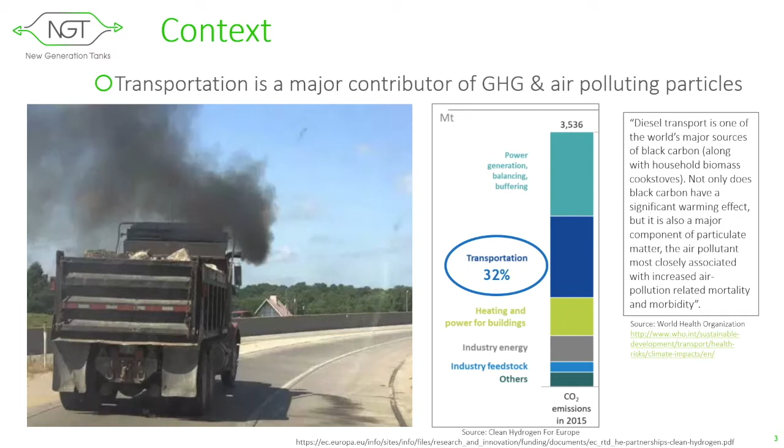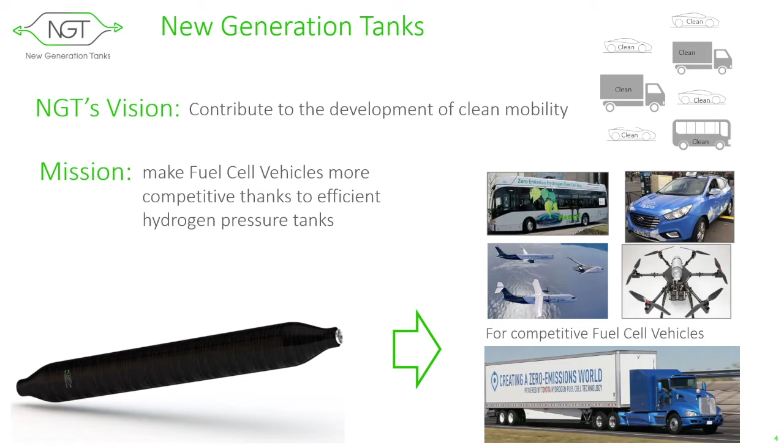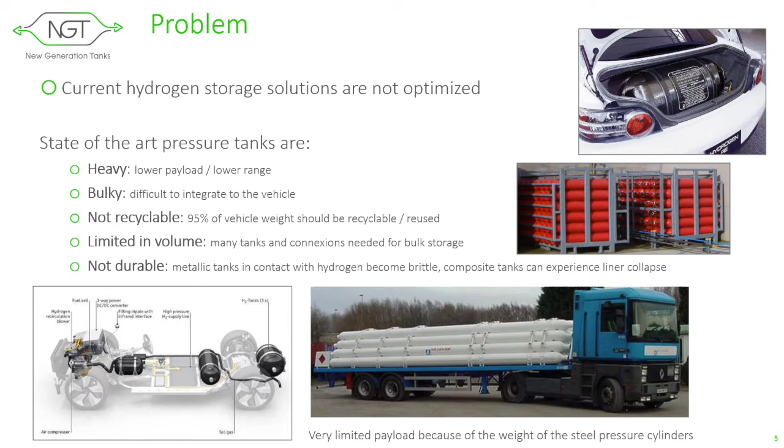New Generation Tanks is willing to contribute to the development of clean mobility. Its mission is to make fuel cell vehicles more competitive thanks to efficient hydrogen pressure tanks. The existing hydrogen storage solutions are not optimized, and pressure tanks are heavy, bulky, difficult to integrate to vehicles, not recyclable, limited in volume, and not durable.

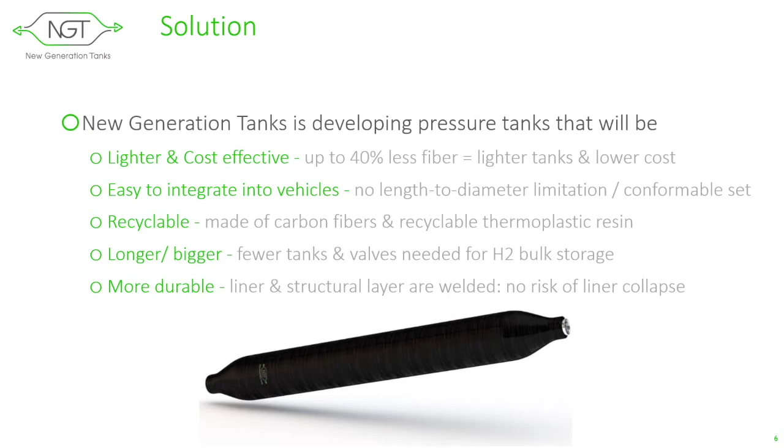New Generation Tanks, or NGT, is developing thermoplastic composite pressure tanks that will be lighter than state-of-the-art pressure tanks, easier to integrate into vehicles, recyclable, and can be made longer and bigger, with a design and concept that optimizes durability.

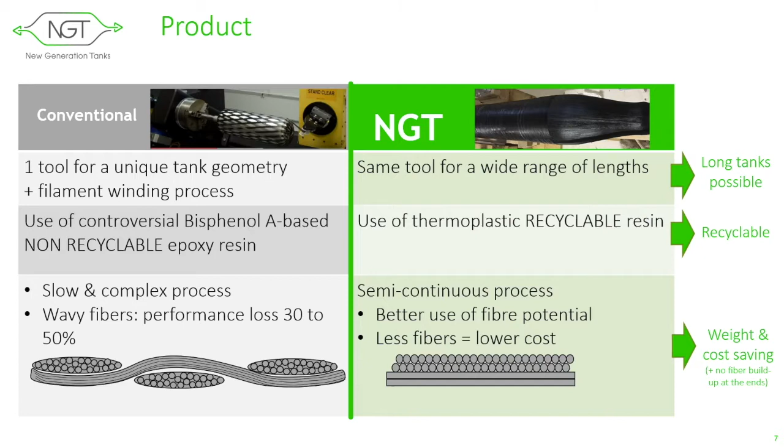Compared to the conventional carbon fiber pressure tank manufacturing process, NGT can make tanks of any length with one single tool, uses recyclable thermoplastic resin, and uses carbon fibers more efficiently, which allows it to save weight.

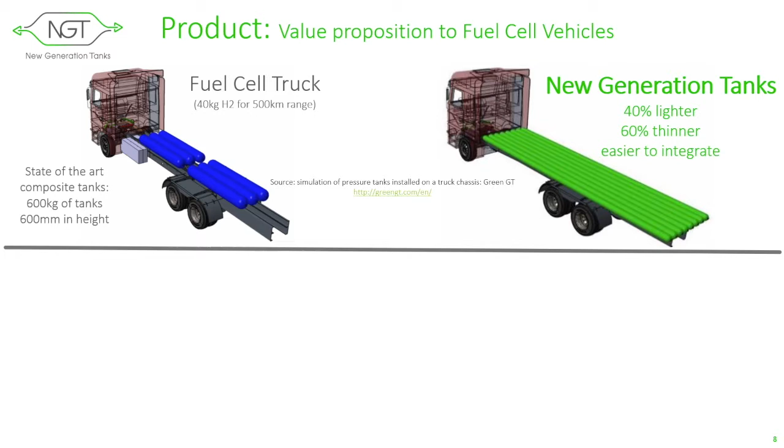On a fuel cell truck, NGT pressure cylinders offer a significant weight and space-saving opportunity and are easier to integrate onto the truck's floor. For a passenger car, a set of pressure tanks from NGT represents a conformable storage solution, offering more space for passengers and trunk.

Overall, NGT's solution allows to minimize the cost of ownership of fuel cell vehicles.

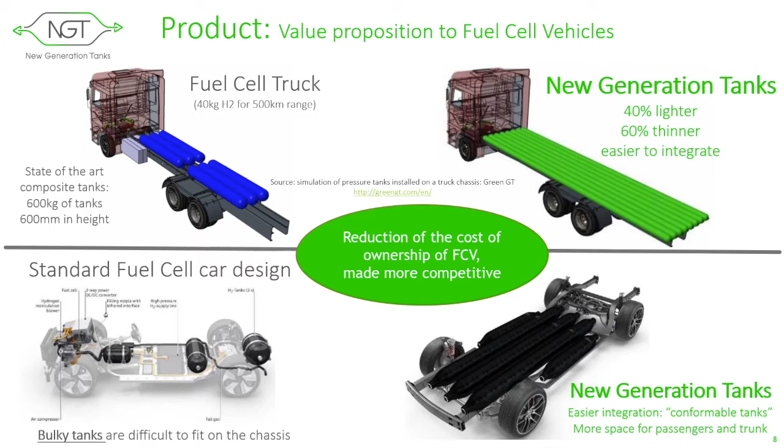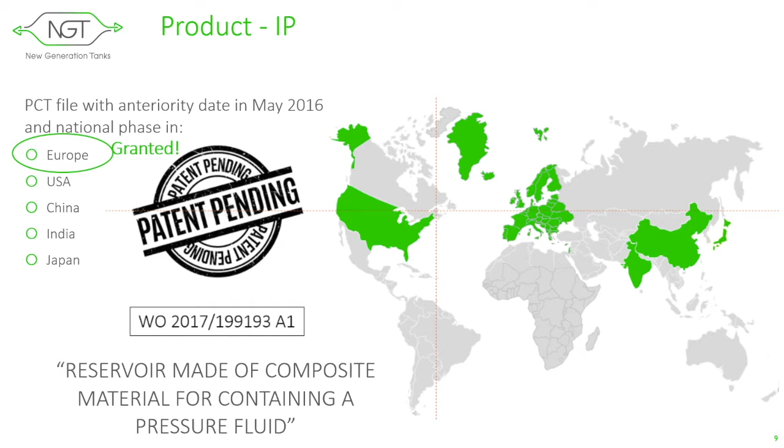The technology is patented in Europe and patent pending in the USA, China, India, and Japan. Significant work has been done so far, with the tank design and simulation tool, the prototyping equipment, and the test setup.

The proof of concept has been validated, and NGT is now at technology readiness level 4, with plans to complete TRL 6 by 2023 and complete industrialization and certification by 2025.

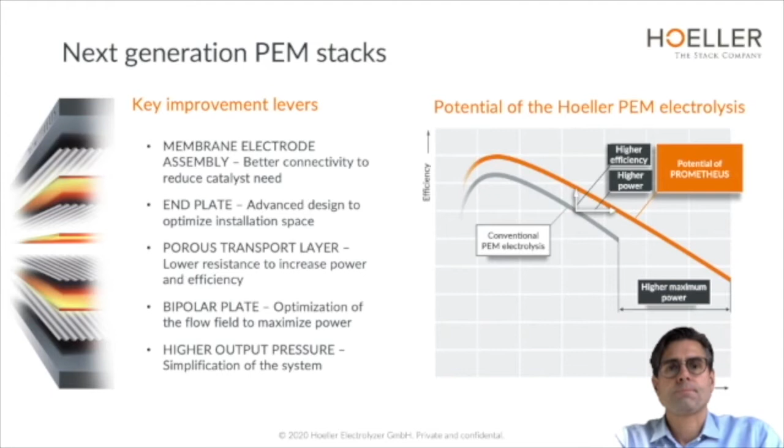We have looked at numerous details in order to improve our stacks versus what is on the market today. With many of our competitors focusing on the entire electrolyzer, we will stick to the stack. This is where our core competency lies and what we know best. With our 3 sizes S, M, and L, we are able to equip a broad range of electrolyzers.

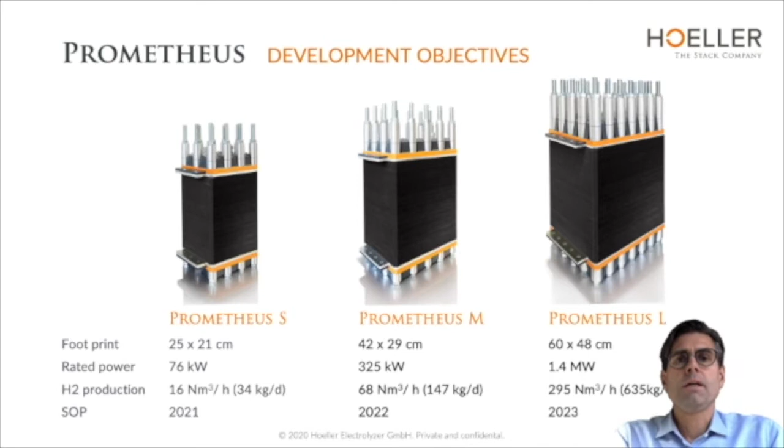We're working hard to enter the market in the middle of 2021. With an increasing demand for hydrogen in Europe and globally, we want to enter the market as quickly as possible. Our product will meet European as well as US standards and will become globally available.

Our vision is to become one of the top 5 stack manufacturers by the end of this decade. We plan to break even in 2023. This would require sales of 20 megawatts of electrolyzers.

But even today, our sales pipeline looks promising. For the next 24 months, we are in discussion for projects with a total volume of around 10 megawatts of stack capacity. We are particularly proud that we are in discussion to supply a leading parcel delivery service in Germany for their pilot project of 500 fuel cell vehicles.

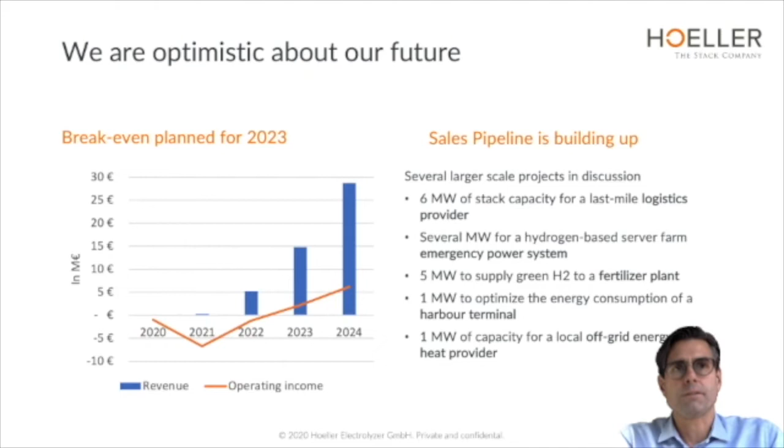We seek investors that share our view on the future of green hydrogen from renewable resources. We already raised 3 million euros for the development of the PROMETHEUS S, and we seek to accelerate our product development and to build our own production facility.

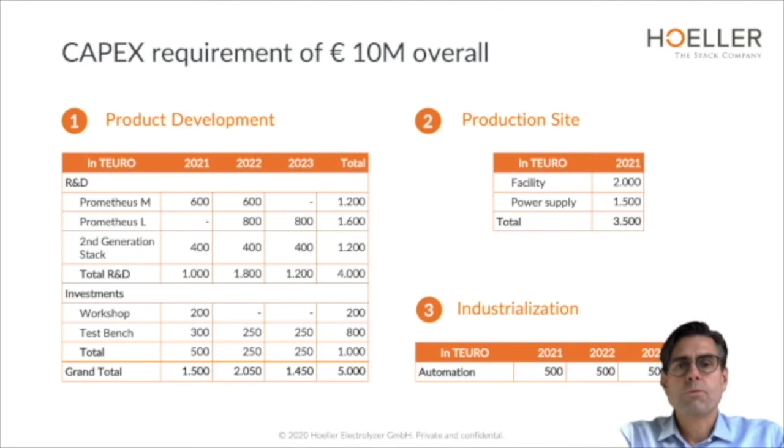Hello, my name is Sonya Davidson. I'm the CEO of a company called H2 Energy Now. Our company's goal is to leave the world a better place for our children and our grandchildren.

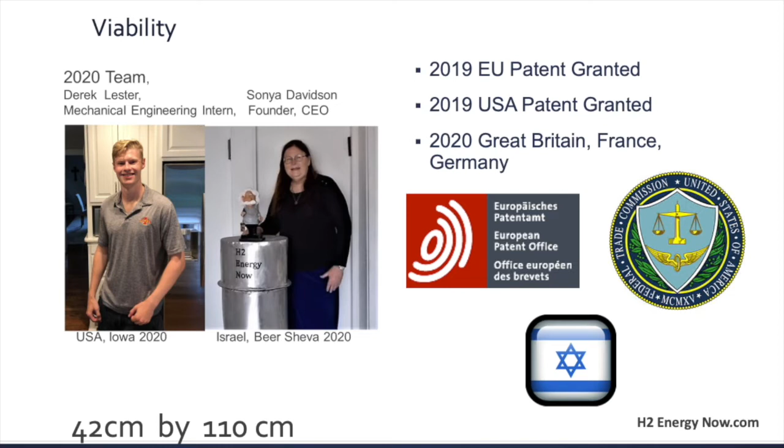In 2019, our European Union and US patents were granted. Also in 2020, additional patents are granted in Great Britain, France, and Germany. This is our 2020 team, which included a virtual intern from Iowa.

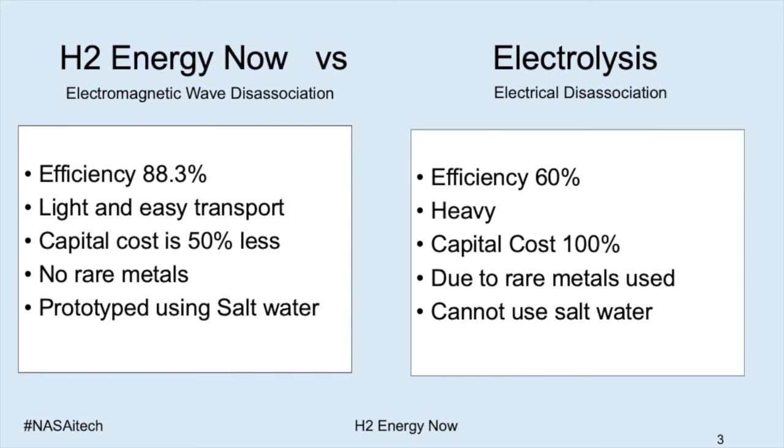Our process is unique in creating hydrogen. We use electromagnetic wave dissociation compared to electrolysis. We're more efficient, we're lighter, our capital cost is 50% less, and we use no rare metals. And we prototyped actually using salt water.

Our process uniquely uses electromagnetic waves to create green hydrogen so it is available to smooth generation cycles. We are currently expanding our test system to support the creation of 100 kilograms of hydrogen a day. Our testing has shown that our system is 88% efficient compared to 60% efficiency for electrolysis.

Our scale-up requirement for power input is 430.2 kilowatts. An equivalent system for electrolysis would cost between $350,000 to $500,000. Our scale-up goal is to keep our capital costs at 50% of an electrolysis system's. Our OPEX is also less.

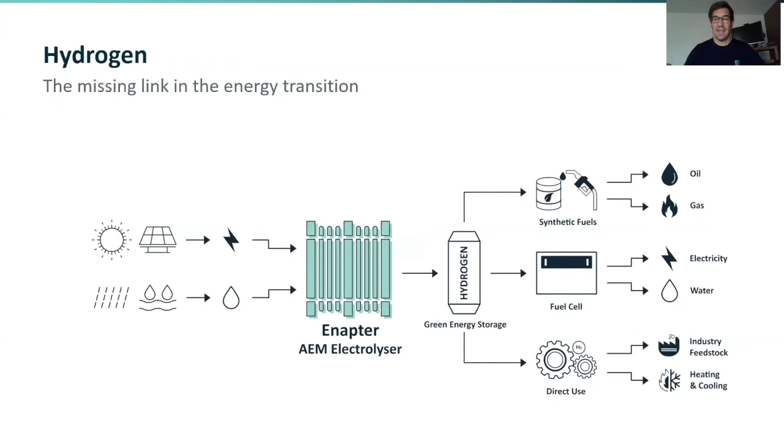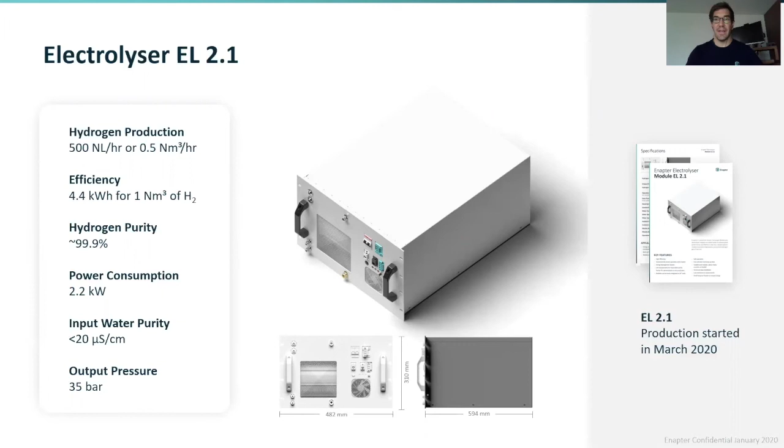But what you will immediately understand is that this device can be stacked to infinite sizes. So you can combine as many of these modules to achieve the flow rate that you need. And here it is mirroring the principle of, for example, the solar panel, which is similarly set up as a small and modular device that you can combine into any kind of size.

We're different because the rest of the industry is building large systems, and the analogy here is the mainframe and the PC that disrupted the computer industry in the 80s. And we hope that we have a place in the market with the offering that we can bring to our customers.

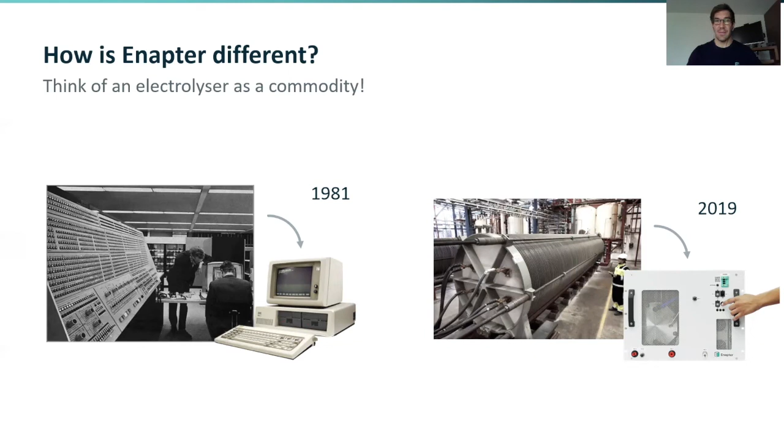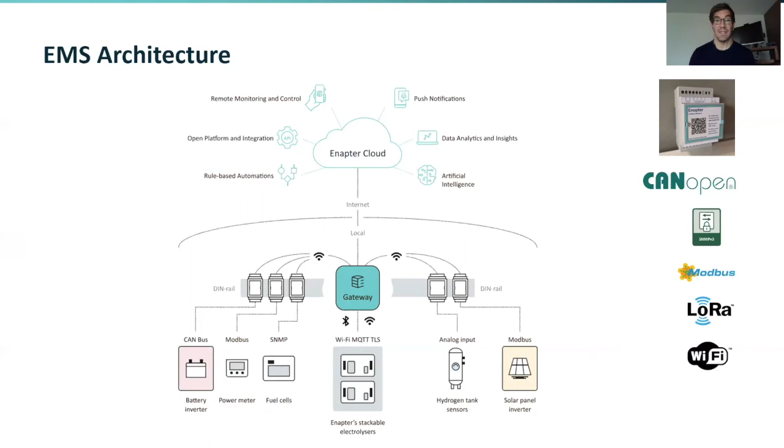We're not only focusing on hardware, we are also very much exposed to software. We believe that energy companies of the future do need to have a hardware and a software offering. And this is why we're developing a very unique energy management system that is low cost and allows the residential energy storage solution to benefit from a good energy management system, as well as the industrial solution that customers might be looking for.

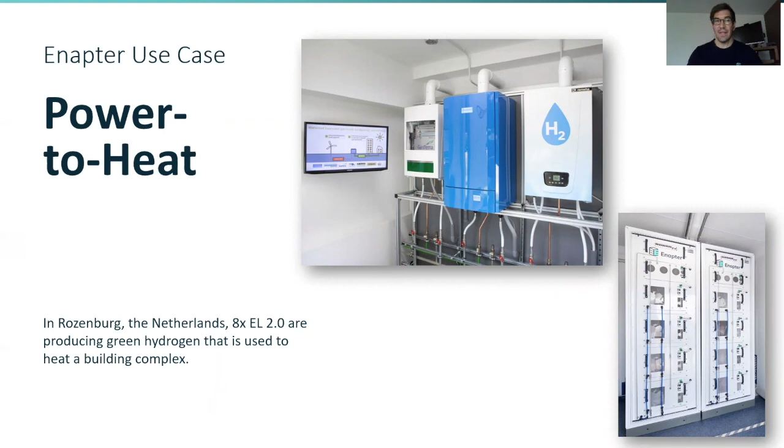But our electrolyzers are used in very innovative use cases. Here it is a power to heat use case where district heating is provided by the hydrogen that we produce. We use our hydrogen refueling stations for drones, for aircraft, for cars, for many different applications.

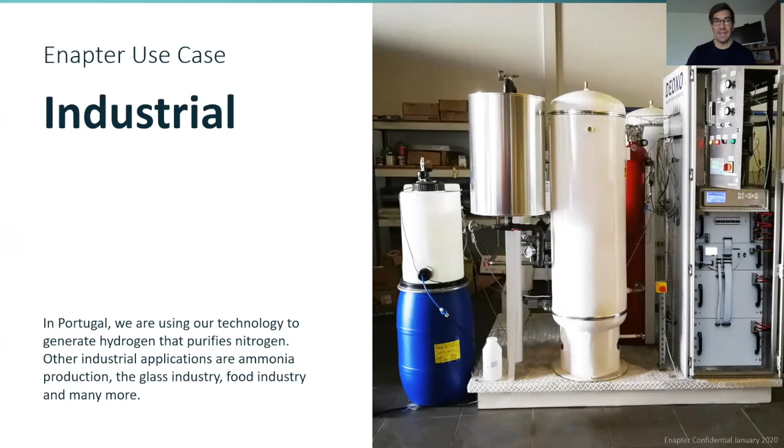We have a bunch of industrial customers who are using hydrogen in float glass manufacturing, nitrogen purification, as you can see here, but also in ammonia production and other cases. Power to gas, an important one as well.

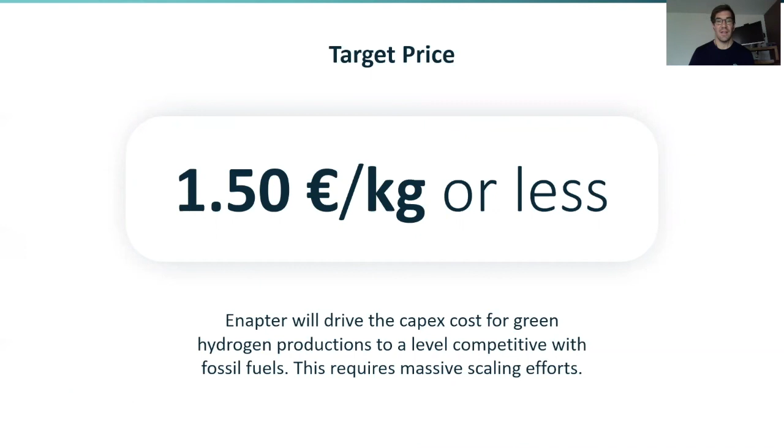Our goal is ultimately to drive the cost for hydrogen down to a price of 1.50 euros or less per kilogram in terms of CapEx. This requires massive scaling efforts, which is why we're investing a lot into automated production lines and ultimately making this green hydrogen reality happen. Thank you very much for your attention.